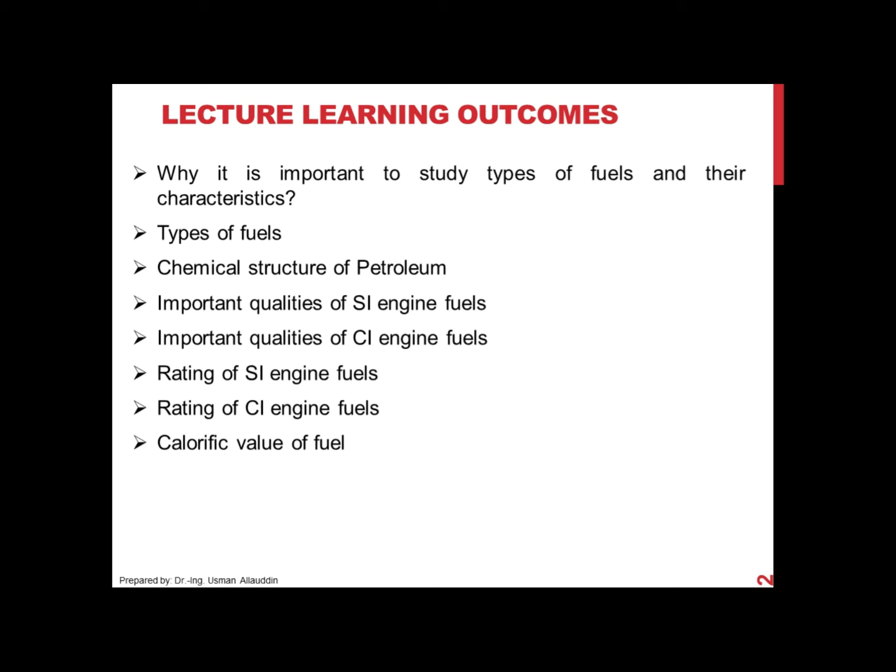These are the learning outcomes of today's lecture. First, we will study why it is important to study different types of fuels and their characteristics. Then we will learn types of fuels, chemical structure of petroleum based fuels, important qualities of SI engine fuels, and important qualities of CI engine fuels. Later, we will study the rating of SI engine fuels and rating of CI engine fuels, and at last we will study the calorific value of fuel, including high calorific value and low calorific value.

Let's discuss why it is important to study different types of fuels. Fuels have been studied since the internal combustion engine came into existence. Internal combustion engines are heat engines, and heat engines convert heat energy into mechanical energy. This heat energy comes from burning fuel.

Fuel has chemical energy. We mix the fuel and burn it in the presence of oxygen, then this chemical energy is converted into heat energy, and then this heat energy is converted into mechanical energy.

Since heat energy is the main input of heat engines, and heat energy is derived from fuel, it is very important to study the fundamental knowledge of different types of fuels and their characteristics in order to understand the combustion phenomena in internal combustion engines.

The characteristics of fuel also decide the design, efficiency, output, reliability, and durability of an engine, because all these parameters depend on the type of fuel used. Gasoline engines are different from diesel engines. Because of the different fuel, we have different design, different output, efficiency, reliability, and durability of an engine.

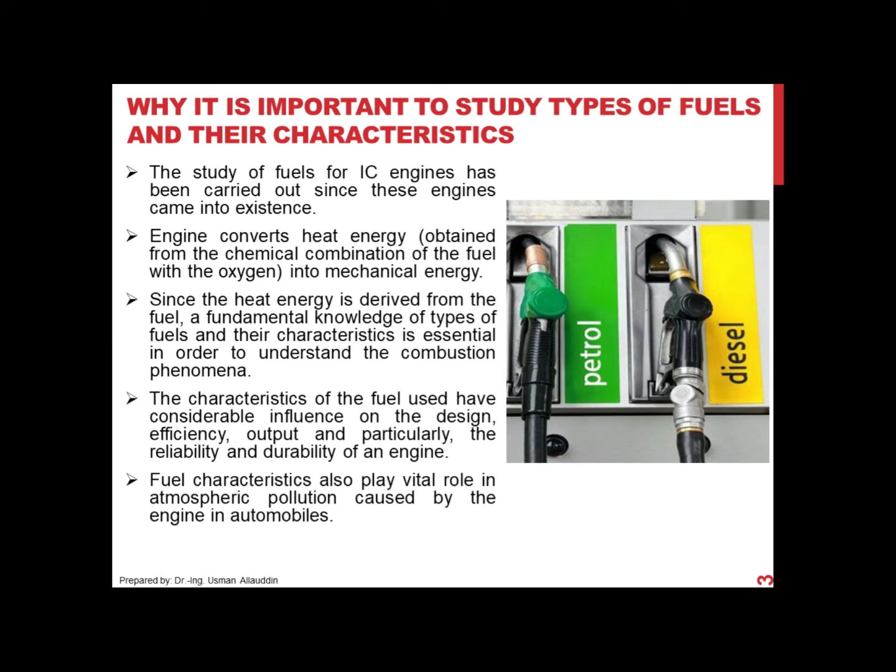These are the main parameters on the basis of which we have to study different types of fuel. Because of this, we have a separate chapter in the book Ganesan on fuels.

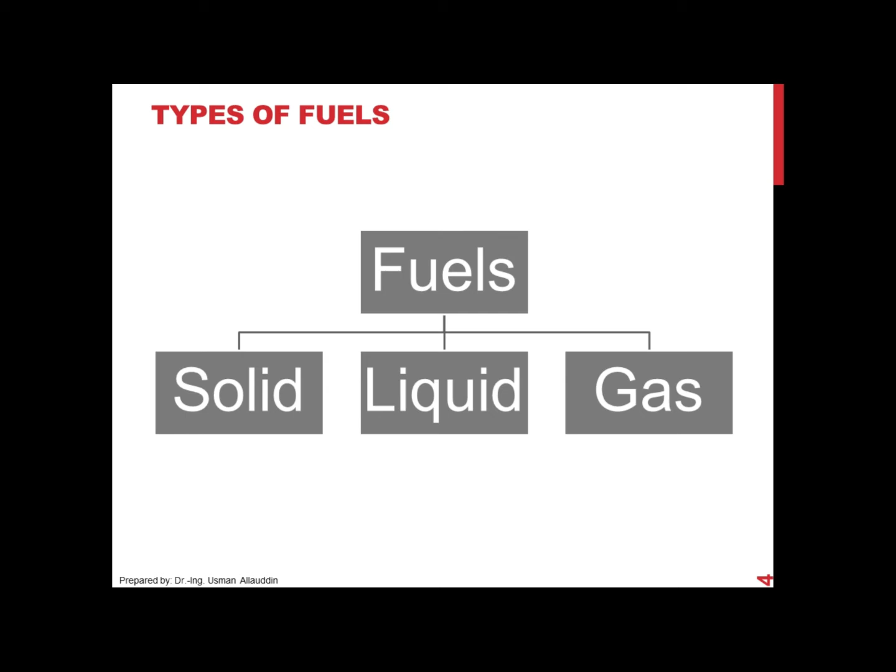Fuels can be broadly classified into three categories: solid fuels, liquid fuels, and gaseous fuels. We will study the advantages and disadvantages of each one by one.

Let's first study solid fuels. In solid fuels we do not have many options. Normally we have coal, and you must have seen in old videos that in the past we had steam engines.

In steam engines we used to use coal or powdered coal. There used to be a furnace on the steam engines, and there was a big pile of coal, with two or three workers who used to throw the coal with shovels into the furnace. In the furnace the coal burns and heat is liberated, and that heat is used to drive the steam engines.

These engines were used in the past, in the initial stages. Now these engines have become obsolete because of their handling problem.

If we have solid fuel, the fuel will have a larger volume, occupying a larger space in the vehicle, and we have to dedicate a big portion of the vehicle to store it. So we have the handling problem, and then solid residuals and ash formation. Like when we burn coal, we have ash and solid residual formation, and these greatly affect the environment by polluting the atmosphere.

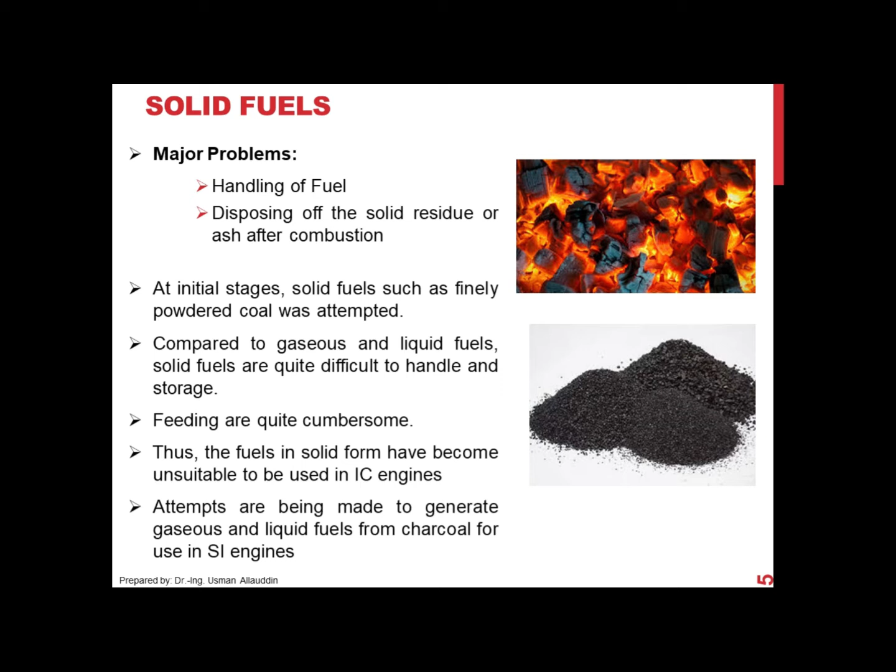If I tell you that you have to use coal in your bike, then you must have a big bag of coal, and there must be a separate person sitting at your back, who with the help of a small shovel must be throwing that coal into the furnace in the bike. The coal will burn, heat will be liberated, and the bike will move. So you can think about how complicated the bike will become. You have to carry additional weight, additional person, additional equipment, and the size and design of the engine will become very complicated. So solid fuels are not being used in internal combustion engines.

In most modern internal combustion engines, liquid fuels, mostly derivatives of petroleum-based fuels, are being used - for example, benzyl, alcohol, gasoline, and other petroleum-based products. Petroleum products form the main fuels for IC engines as of today. Currently, mostly petroleum-based liquid fuels are being used, like petrol or diesel in internal combustion engines, and kerosene in aircrafts. Then we have the gaseous fuels.

Gaseous fuels are ideal because they are in the gaseous form, and you know that to burn fuel, we need oxygen, which is also in gaseous form. So gaseous fuel and oxygen will mix very easily, making a homogeneous air-fuel mixture that can be burned very easily.

The problem with liquid fuel is that we can only use liquid fuels which are volatile, meaning the fuel should be evaporated, converted into vapor form, so that the vapor molecules of the fuel mix with air and form a proper homogeneous air-fuel mixture. So the problem with liquid fuel is that it should be volatile.

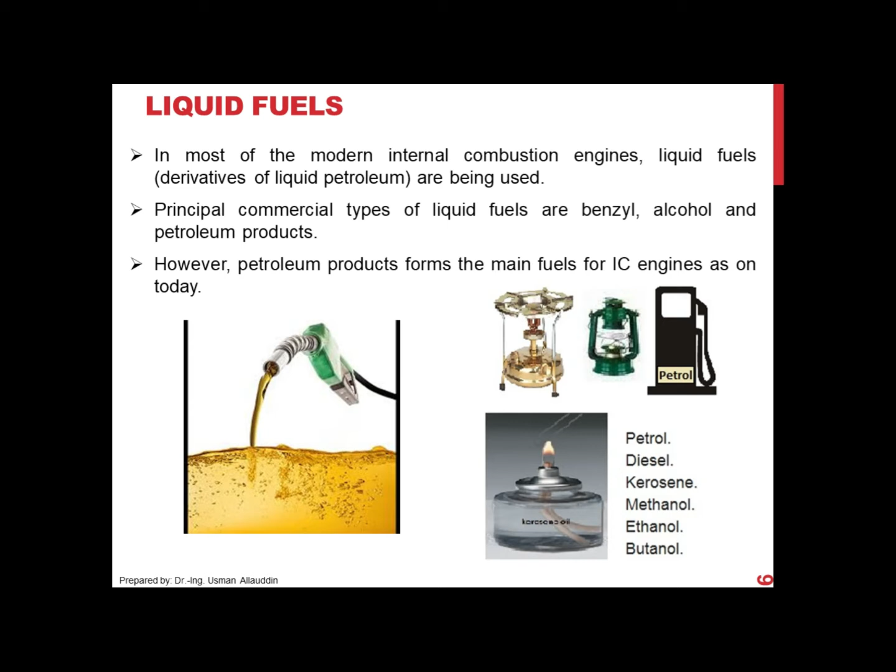But gaseous fuels are ideal in the sense that they are already in the gaseous form, and oxygen is also in the gaseous form. So gaseous fuel and oxygen can mix together and form a homogeneous mixture very easily, and that fuel can be provided to the engine through the distribution system, and the starting problems of the engine can be eliminated.

However, you know that the gas occupies a larger volume. So again, we will be facing the storage and handling problems.

Like those who are using CNG based cars, they must be experiencing these problems. If you want to run your car on natural gas, we will be using a very large cylinder at the back of the car, and that cylinder has weight, very high weight. So the performance of the engine is affected by the presence of this CNG cylinder. You cannot put luggage at the back of the car, the dicky will be occupied.

Secondly, the car is not actually empty, because the CNG cylinder is there, its weight is there. So, for example, you're always carrying one person's worth of weight in the form of the CNG cylinder. So we face these storage and handling problems.

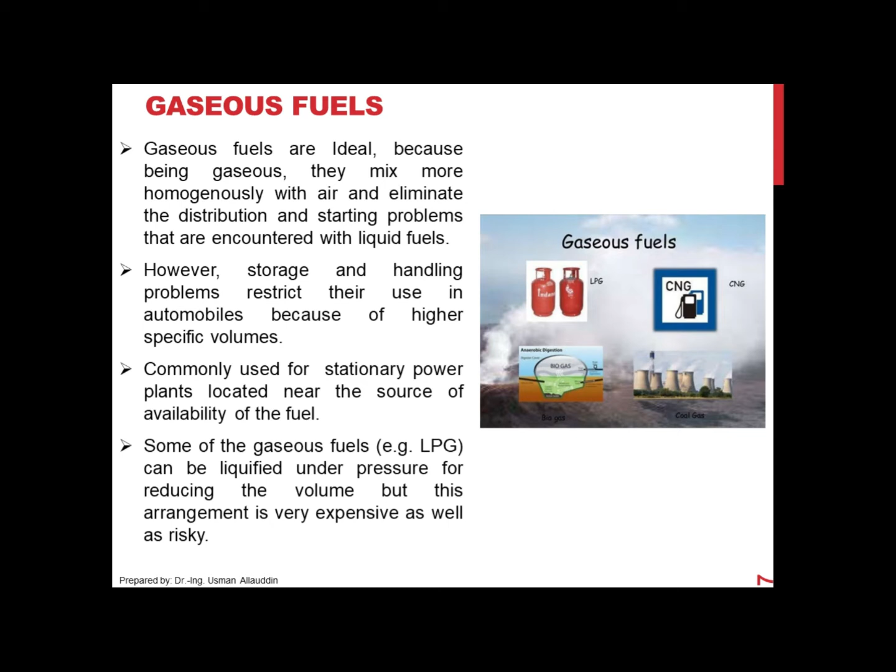Okay, so now that was a quick comparison of solid, liquid, and gaseous fuels. Now we will broadly discuss the chemical structure of petroleum-based fuels. Normally, in petroleum-based fuels, we have paraffins, olefins, naphthenes, and aromatics.

What are paraffins? You have studied this in second year chemistry, in organic chemistry. Paraffins are like alkanes, with general formula CnH2n+2. For example, if n is 2, C2H6, it will be ethane. These alkanes are chain type compounds, and they are saturated because they have single bonds, and the single bond is relatively stronger than the unsaturated bond, that is the double bond or pi bond. That is why they are called saturated, and because of the single bond they are stable.

Olefins are also called alkenes. Alkenes have at least one double bond in their structural formula, and their general formula is CnH2n. They are also chain type compounds, and because of the presence of the double bond, these compounds are unsaturated and unstable. You must remember that these compounds are highly involved in different types of reactions, because they are unstable and react with other elements.

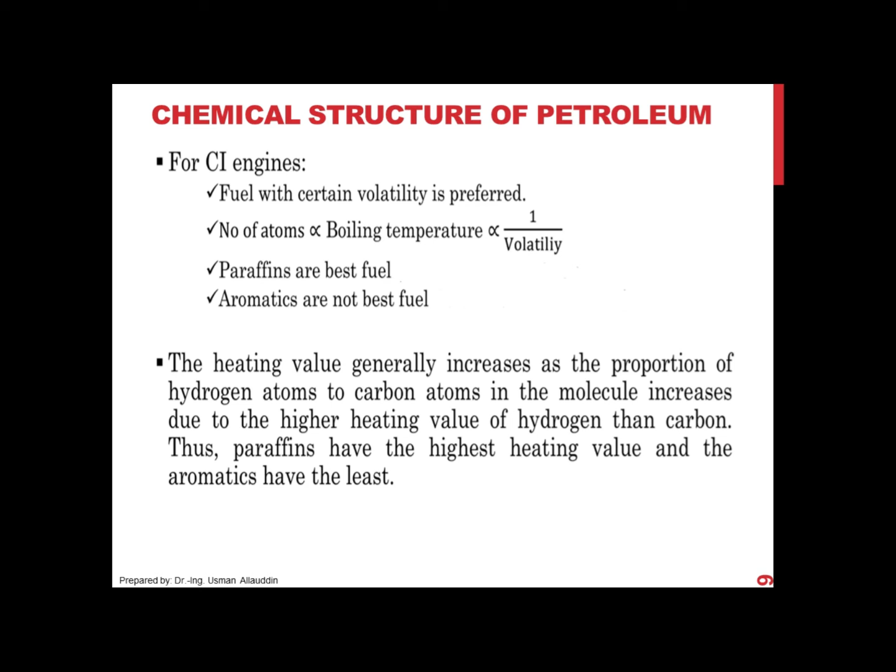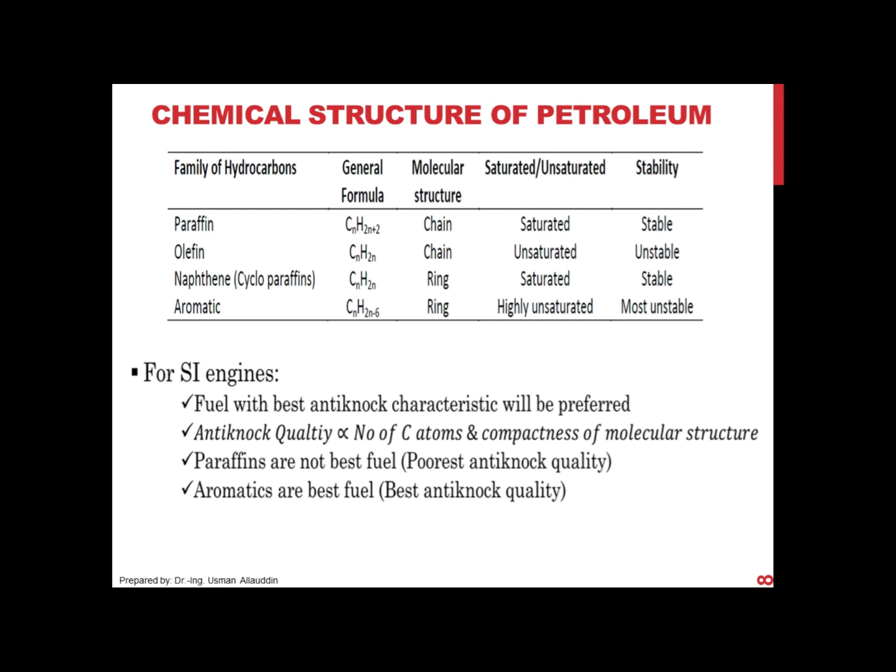Paraffins have the highest heating value, and aromatics have the least, because in paraffins we have the formula CnH2n+2, while in aromatics we have CnH2n-6. If N is 6, then 2 times 6 is 12, plus 2 is 14 hydrogen atoms, giving C6H14. Whereas for aromatics, C6, 2 times 6 is 12, minus 6 is 6, so there are only 6 hydrogen atoms. Since aromatics have fewer hydrogen atoms than paraffins, paraffins' heating value should be higher because of the higher number of hydrogen atoms.

Now we will study some important qualities of SI engine fuels. First of all, the very important property of SI engine fuel, as I already explained, is volatility. SI engine fuel should be highly volatile, because we need fuel which is very quickly converted into gaseous form, then mixed with air to form a homogeneous air fuel mixture, which is supplied to the combustion chamber through the intake manifold. So volatility should be high.

So what is volatility? Volatility is the evaporation of liquid at a certain temperature. If fuel is not converting into gaseous form, it means its volatility is very low. And if the fuel is very quickly converting into gaseous form, it means its volatility is very high.

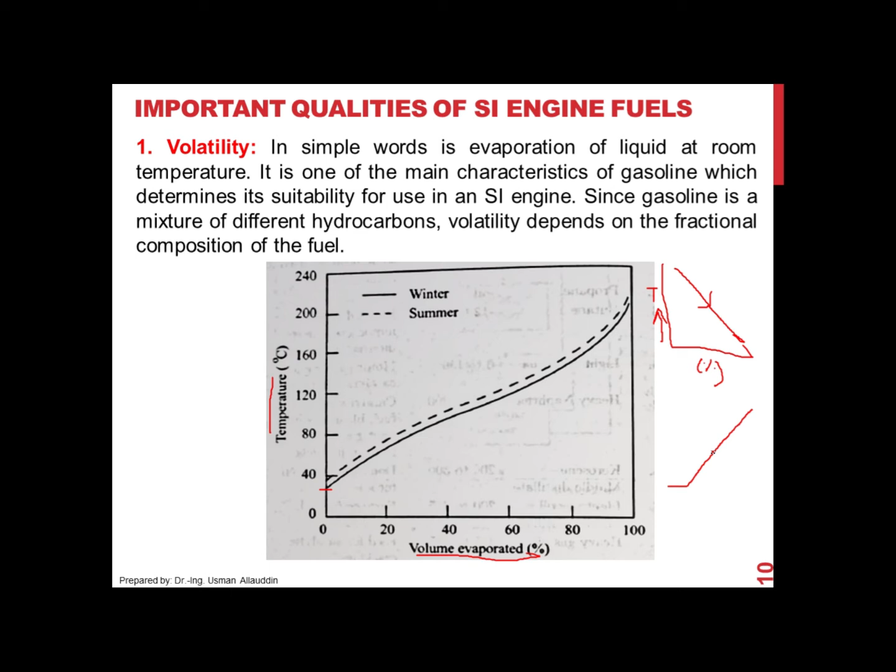It is because of the fact that due to low temperatures in winter, the fuel volatility is decreased, and the air fuel mixture is not formed, so the engine does not start. So you face these problems. In order to overcome these problems, we use the glow plug, which heats the fuel and avoids the starting problems in internal combustion engines.

The second characteristic required in the SI engine fuel is that it should support starting and warm up. At room temperature, at least 5 to 10% of the fuel should be evaporated. If we have this characteristic, then it is good. So we need this characteristic in the SI engine fuel.

If we have this characteristic, then we will not face startup and warm up problems. For this we need low distillation temperatures throughout the range of the distillation curve for best warm up. In the distillation curve, low distillation temperatures are required. So if, for example, 5% or 10% of the fuel is evaporating at 100 degrees Celsius, then this is not a good fuel.

The temperatures at which about 5 to 10% of the fuel is evaporated should be low, close to room temperature. So the fuel characteristic should be such that it avoids the problem of starting and warm up, but it should also support the whole operating range of the engine.

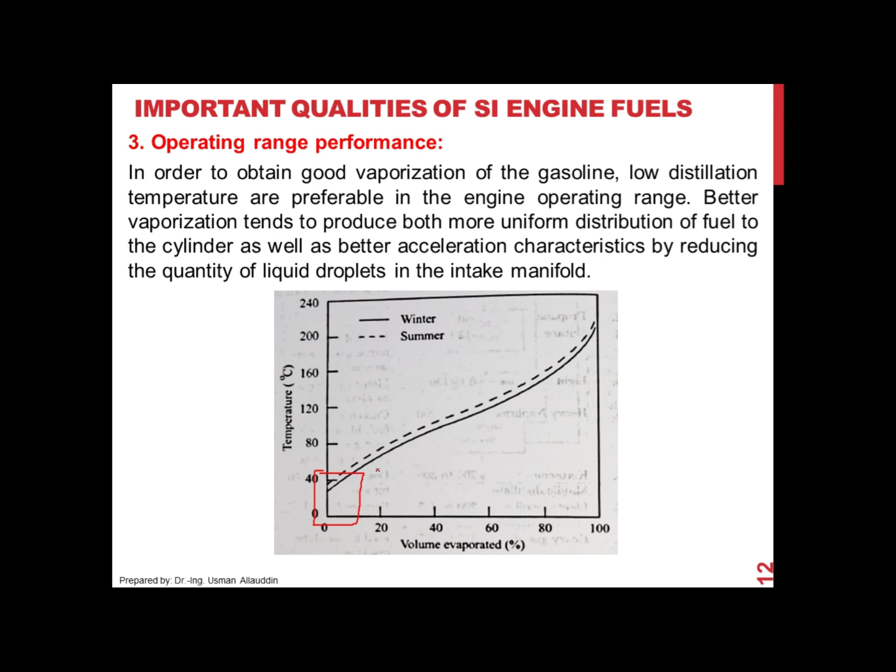This is required for better acceleration characteristics of the engine. If we have such characteristic that fuel volatility increases with temperature, then liquid droplets are not formed in the intake manifold, because if the fuel is not evaporating, liquid droplets are formed. But if the fuel volatility is high and supports the whole operating temperature range, then the fuel will readily evaporate, and liquid droplets will not be formed.

Now, crankcase dilution. Suppose the fuel is not evaporating, is not volatile - what will happen? Fuel in liquid form will go into the engine, and we have a layer of lubricating oil on the moving parts, like in the crankcase. When the fuel in liquid form enters the engine, these liquid droplets will mix with the lubricating oil and remove the layer of lubricating oil from the crankcase, and the crankcase will become diluted.

The lubricating oil will be removed from the crankcase, and then that part of the crankcase will be moving without lubricating oil, so it will affect its life, it will deteriorate the shape of the crankcase.

When the liquid fuel goes into the engine, it will mix with the lubricating oil, and the lubricating oil performance will be affected. The oil has a sticky touch, a sticking property, different from the liquid fuel. So when the fuel keeps mixing with the lubricating oil, its oiliness will be lost.

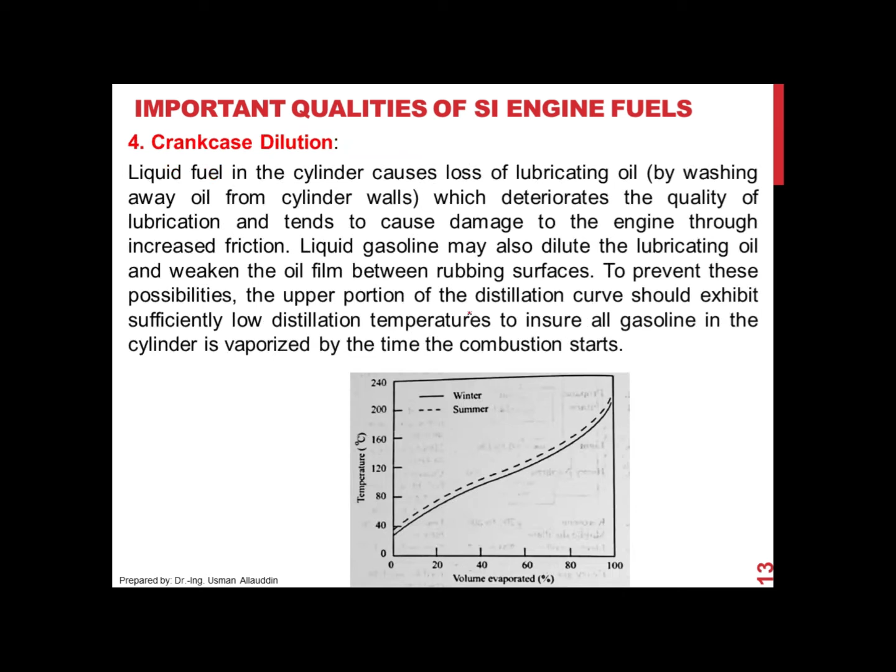So we have to make a compromise, that fuel volatility should be moderate - not very high, not very low. Because if the fuel volatility is low, we will face crankcase dilution, operating range performance issues, and starting and warm-up problems. And if the fuel volatility is very high, we will face the problem of vapor lock. So to avoid all these problems, we use a fuel with a certain suitable value of volatility.

Number six, the anti-knock quality - this is the obvious requirement that we need such SI engine fuel which should have a good anti-knock quality, that is, the fuel should have good resistance to knocking.

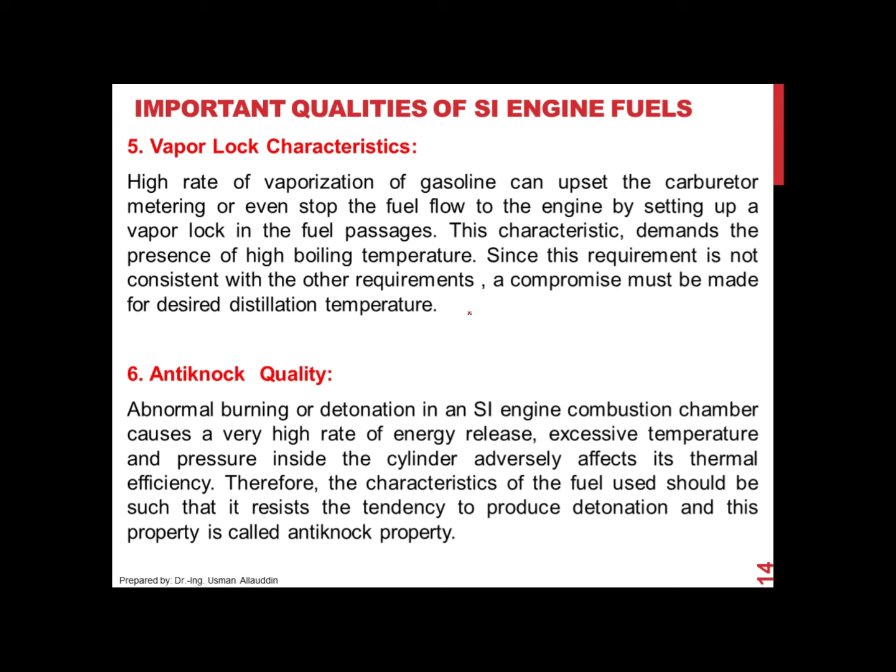Another desired characteristic of SI engine fuel is that it should not form gum deposits. Gasoline and petrol are petroleum-based fuels, and they are hydrocarbons. The problem with hydrocarbons is that when you store them in a tank and they react with oxygen, liquid gummy compounds are formed, and solid gummy substances form at the layer exposed to the atmosphere.

If you do not use your vehicle and the fuel stays in the fuel tank for 2, 3, or 6 months, these gums form as solid deposits. When these solid gummy substances go into the engine, they will damage the internal combustion engine. So the desired quality of SI engine fuel is that it should not form gum deposits.

The amount of gum increases with increased concentration of oxygen, with rise in temperature, with exposure to sunlight, and also on contact with metal. If the fuel is exposed to sunlight, these gummy substances are formed. And if we increase the concentration of oxygen, the concentration of gummy substances will also increase.

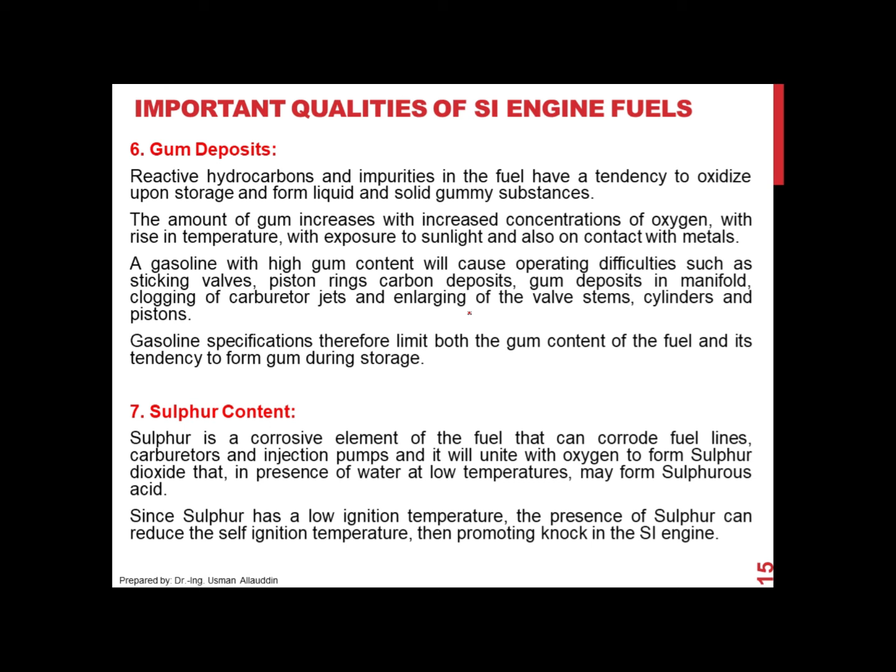The seventh characteristic of SI engine fuel is that it should have a very low content of sulfur, because sulfur is a corrosive element and can corrode the fuel lines, carburetors, and injection pumps. It will also unite with oxygen to form sulfur dioxide, which is a highly toxic gas, and in the presence of water at low temperature they form sulfurous acid, which is a very dangerous acid. So we need fuel for SI engines that has low sulfur content. These were some important characteristics of SI engine fuels.

Now we will study the important qualities of CI engine fuels. The first quality is knock characteristics.

Now you must be wondering that we studied knocking only occurs in SI engines, but knocking also occurs in compression ignition engines. The reason for knocking in CI engines is very different. Knocking occurs in both types of engines, spark ignition and compression ignition, but the reason is totally different in each.

So what is the reason of knocking in CI engines? Let me explain. As I've told you many times, in compression ignition engines we only compress air, and then we spray the fuel into the compressed air. So now what happens, let's suppose...

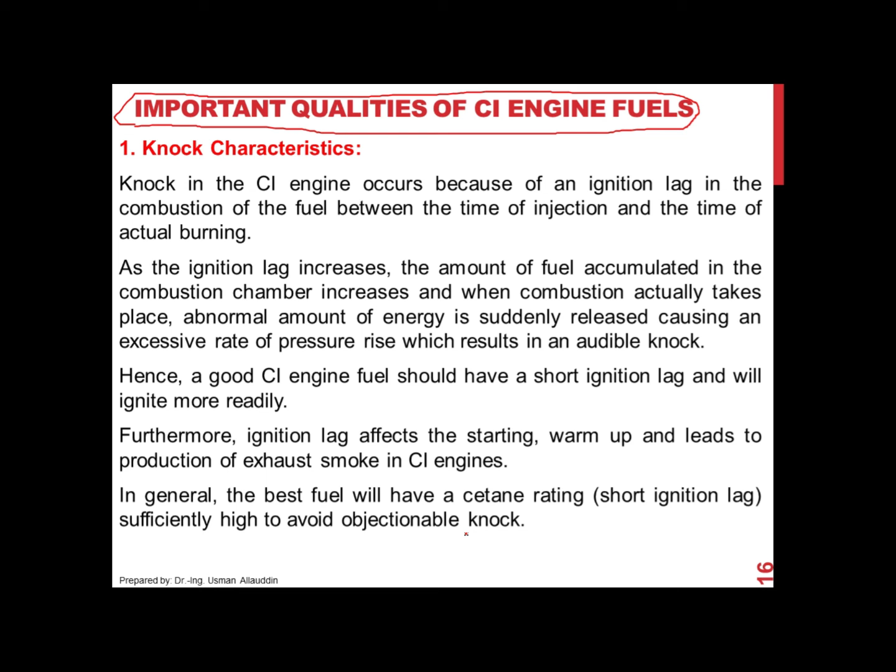The second property required for CI engine fuel is volatility, but it should be moderately volatile, not highly volatile.

We need such a fuel in CI engines that provides very good starting characteristics of the engine. This requirement demands that the fuel be volatile enough to form a combustible mixture readily, and have a high cetane rating so that the self-ignition temperature is low.

The fuel should be volatile enough that a proper combustible air-fuel mixture is formed and combusted, because if the fuel is not evaporating, its effective self-ignition temperature becomes high and combustion will not take place.

But if the fuel is volatile enough, a good homogeneous air-fuel mixture is formed when you spray it into the hot air. It absorbs heat from the compressed air and starts evaporating, forming gaseous fuel, which mixes with hot air to form a homogeneous air-fuel mixture that is then combusted. So if the homogeneous mixture is formed, its self-ignition temperature will be low and it will be very easily combusted.

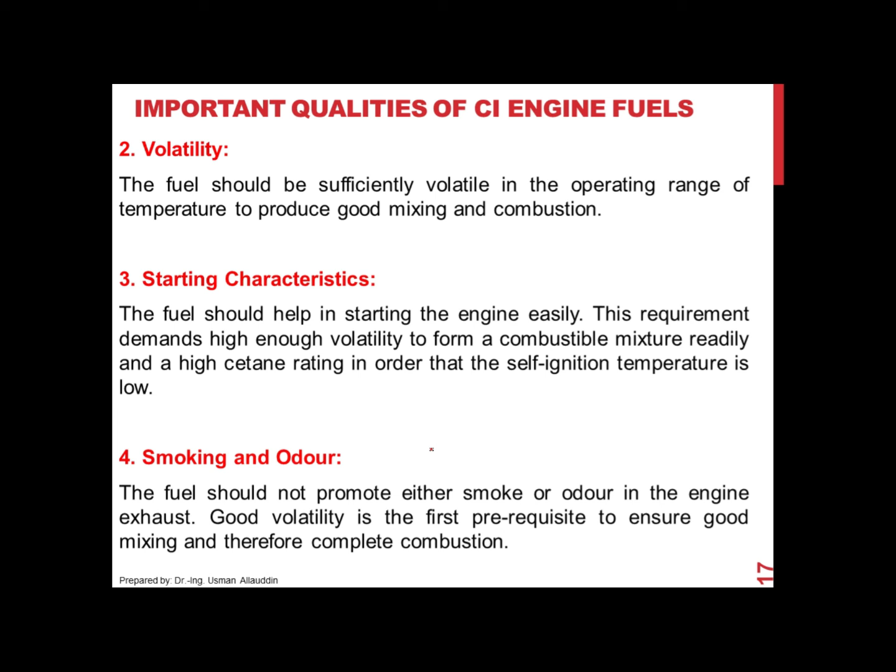The fourth desired property of CI engine fuel is that it should not form smoke and odor when burned in the engine.

Normally we use cheaper fuels in CI engines, and these cheaper fuels have higher values of viscosity, but they should not have too much viscosity that the fuel is unable to flow into the fuel lines or other passages. So we need a fuel with such viscosity that it can easily flow through the different passages of the engine.

The fuel should not corrode or wear the different parts of the engine. This is the sixth requirement of CI engine fuels.

It should be easily handled. Its properties should be such that it can be easily handled, easily stored, and easily supplied to the different parts of the engine. So it should have such characteristics.

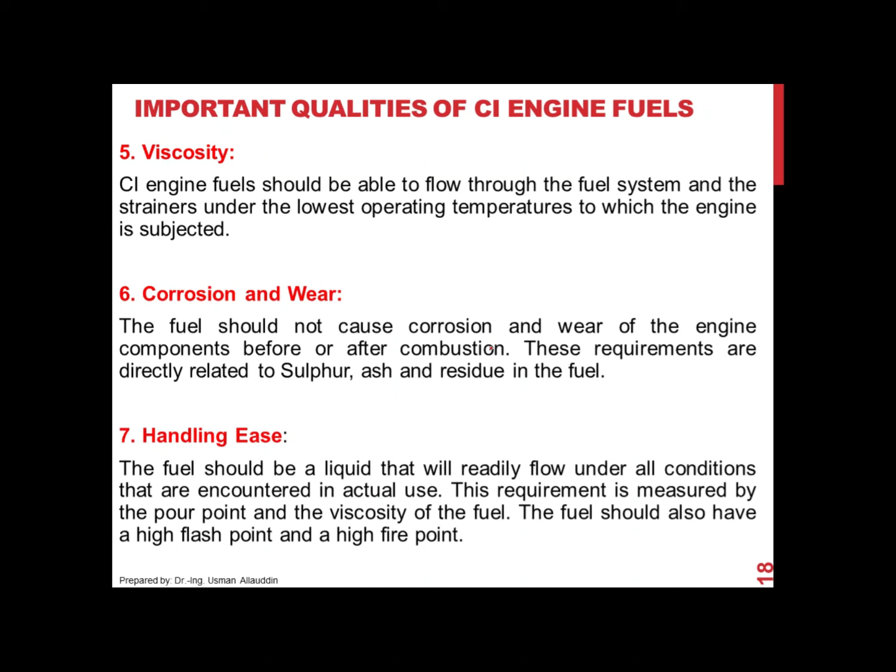Okay, now we have studied different important qualities of SI and CI engine fuels. Now we will start a new topic: rating of SI engine fuel. Actually, rating of SI engine fuel is the...

Resistance to knocking. So if we have two fuels, fuel A and fuel B, and I say that fuel A has high fuel rating and fuel B has low fuel rating, it means fuel A has high resistance to knocking and fuel B has low resistance to knocking. So rating is like a number from 0 to 100 which describes the resistance to knocking.

We want to develop a method according to which we can rate different SI engine fuels. If we have a fuel with 100 number, we can say that its rating is maximum, and its resistance to knocking is maximum, and that fuel can be used at high values of compression ratio, and high compression ratio means higher efficiency. And if we have 0 or 1 rating, it means it has a very poor rating, it's a very poor fuel, and its resistance to knocking is very poor. This number is actually the octane number.

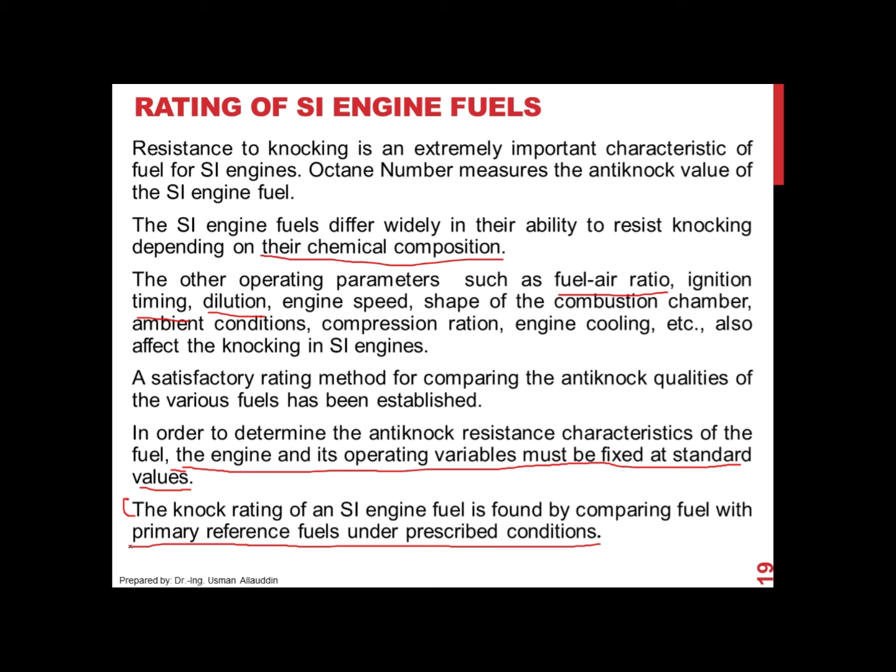If you remember in chemistry, when you want to determine the molecular weight of an element, you develop some standard, and that standard is the carbon atom. So if you want to find the molecular weight, you always compare it with the molecular weight of the carbon atom, because the weight of the carbon atom is standard. We will do the same thing: we will first select the reference fuels, the standard fuels, and these reference fuels are...

Isooctane and normal heptane. Isooctane has very good anti-knock characteristics, it has the highest resistance to knocking. When used in different engines, it is observed that isooctane has the highest resistance to knocking. So we have arbitrarily assigned a rating of 100 octane number to isooctane.

Then we have the other standard, normal heptane, and we have observed that normal heptane has very poor anti-knock quality. That is, if we use normal heptane, at very low values of compression ratio we start observing knocking, which means normal heptane has very poor resistance to knocking. When we use isooctane in an engine, we can run it at very high values of compression ratio and not observe knocking, showing it has very high resistance to knocking. So we arbitrarily assign 100 octane number to isooctane, and 0 octane number to normal heptane.

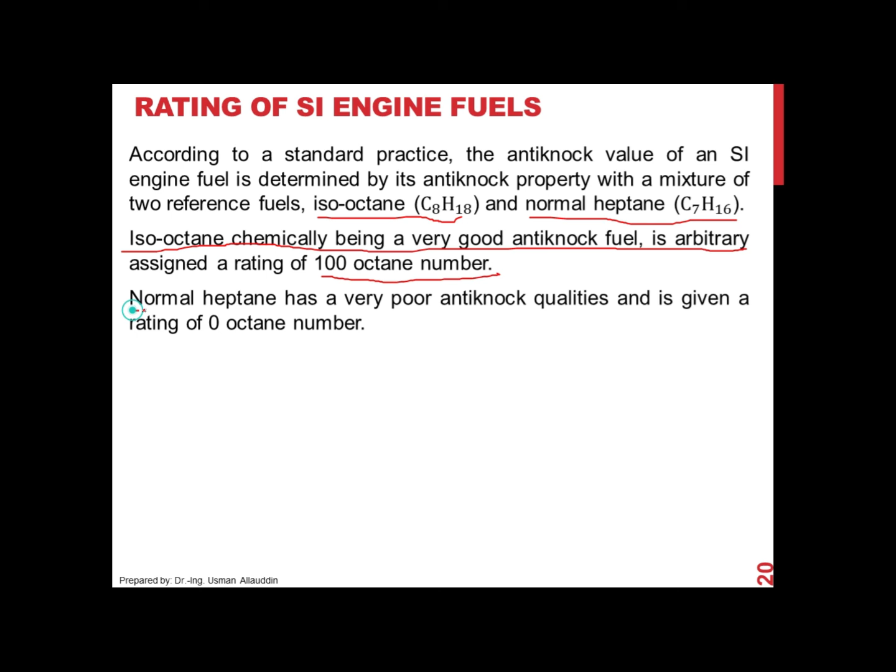So now we have two standards: isooctane has 100 number, and normal heptane has 0 number.

Let's suppose we want to determine the octane number of fuel A. So we will take fuel A, put it into an engine, and at some standard operating conditions, we will use this fuel at different values of compression ratio—compression ratio 1, 2, 3, 4—

Until we start observing the knocking. What we are doing is using fuel A in the engine and increasing the compression ratio, and we stop increasing it until we observe the knocking.

When we observe the knocking, we will note this value. Now we will remove fuel A from the engine, and we will try to prepare a mixture from isooctane and normal heptane, taking different proportions, like 10% isooctane 90% normal heptane, 20% isooctane 80% normal heptane. We use different percentages of isooctane and normal heptane, and we try to get the knocking at the same value of compression ratio at which we observed the knocking for fuel A.

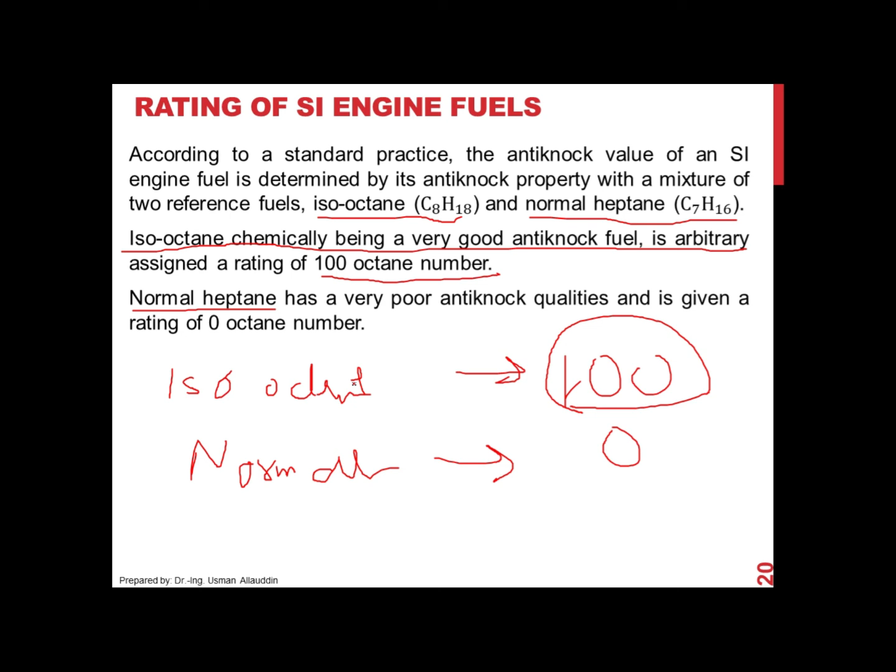So now the question is, can we have octane number greater than 100? The answer is yes, we can have octane number greater than 100. How can we achieve that? By adding different additives, like compounds such as tetraethyl lead. If we add tetraethyl lead to the fuel, then the fuel's octane number will actually become greater than 100.

But the problem is that tetraethyl lead is not good, because when you use tetraethyl lead in the fuel, lead particulates will be formed in the exhaust gases, and these lead particulates will cause cancer problems in living things.

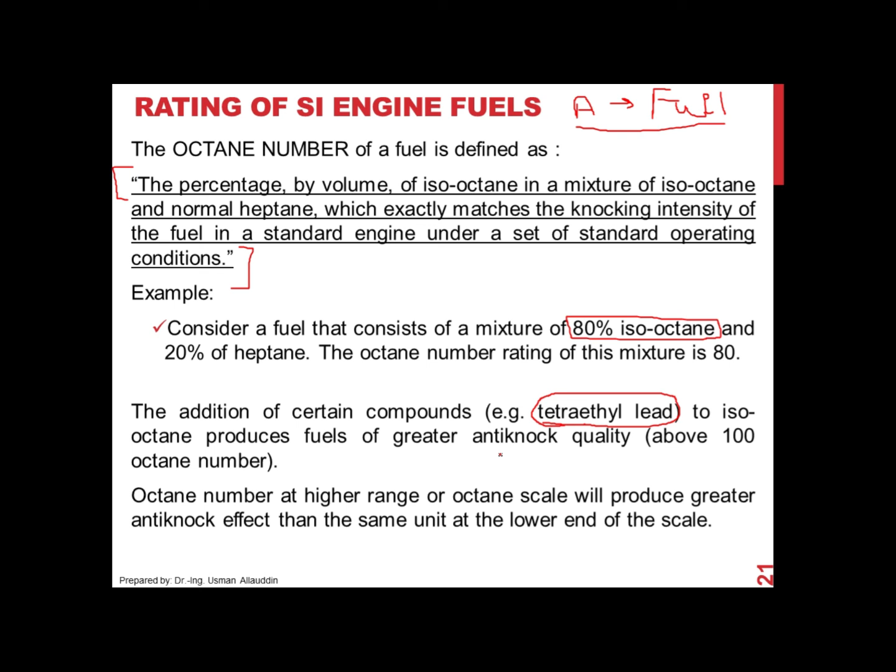So there are some other additives also available which can be added into the fuel to achieve an octane number higher than 100. In the book, if you go to chapter 6 of Ganesan's book, there is a formula given which relates the octane number to the percentage of tetraethyl lead. You can determine the octane number, like 102, 103, or 104, depending on the percentage of tetraethyl lead added into the base fuel.

A high octane number shows high resistance, and a low octane number shows low resistance. So if you go to the market and find two fuels, one with a high octane number and one with a low octane number, you should go for the high octane number fuel, because it will have greater performance.

Because if you buy a high octane number fuel, then that engine can be run at higher values of compression ratio, and a higher compression ratio means higher efficiency and higher performance.

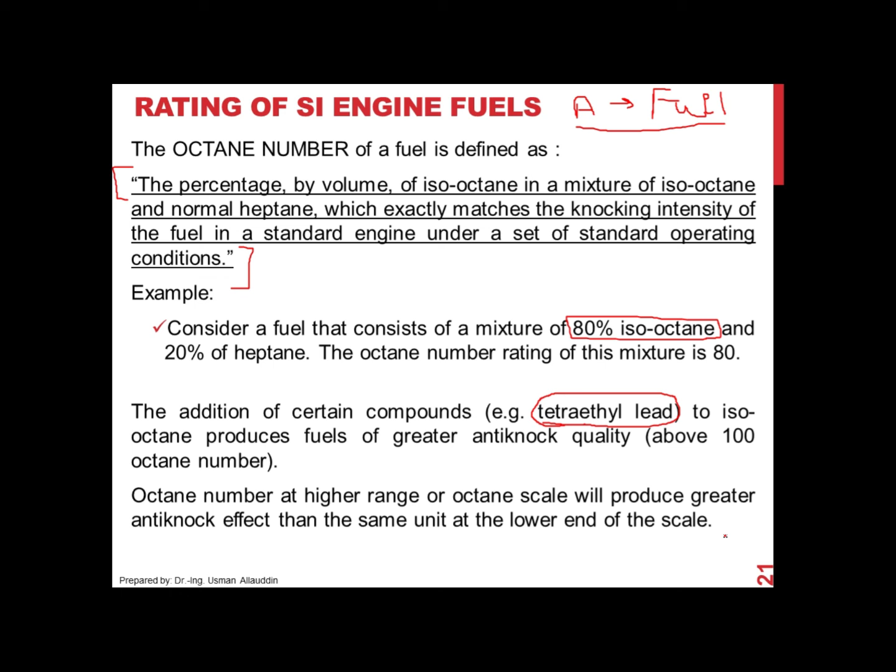Similarly, the rating of CI engine fuels is determined in the same way using two standards, but the standards are different for CI engines. One is normal cetane, arbitrarily assigned a cetane number of 100, and alpha methyl naphthalene, C11H10, arbitrarily assigned a cetane number of 0.

So the rating of CI engine fuel is determined with the help of cetane number. Like we studied, the octane number defines the rating of SI engine fuel, so the cetane number defines the rating of CI engine fuel. If we have a high cetane number, it means the fuel has very low self ignition temperature and very low ignition lag, so when sprayed into the cylinder it will be immediately burned.

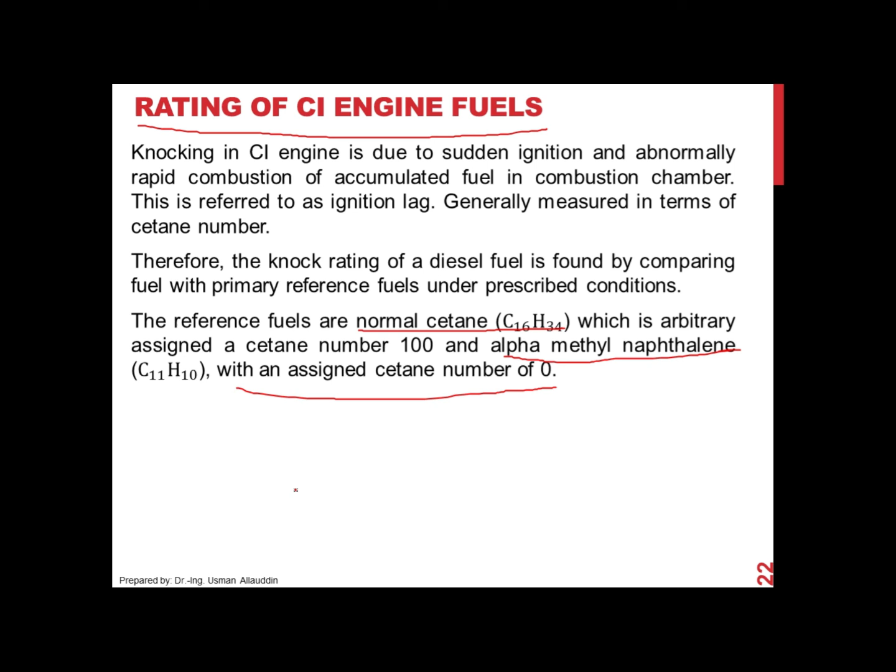Similarly if the cetane number is high, we take a fuel A and run the engine with it, observing at what compression ratio knocking is observed. Then we remove fuel A and make a mixture of normal cetane and alpha methyl naphthalene, trying to match the same intensity of knocking. When this is achieved, we note the percentage of normal cetane present in that mixture, and that will be the cetane number of the fuel.

So you can read this definition to understand it better. The cetane number can be easily improved by adding additives such as amyl nitrate, ethyl nitrate, or ether. If you add these compounds to CI engine fuels, the cetane number will be improved, and improved cetane number means the performance of the engine will be improved.

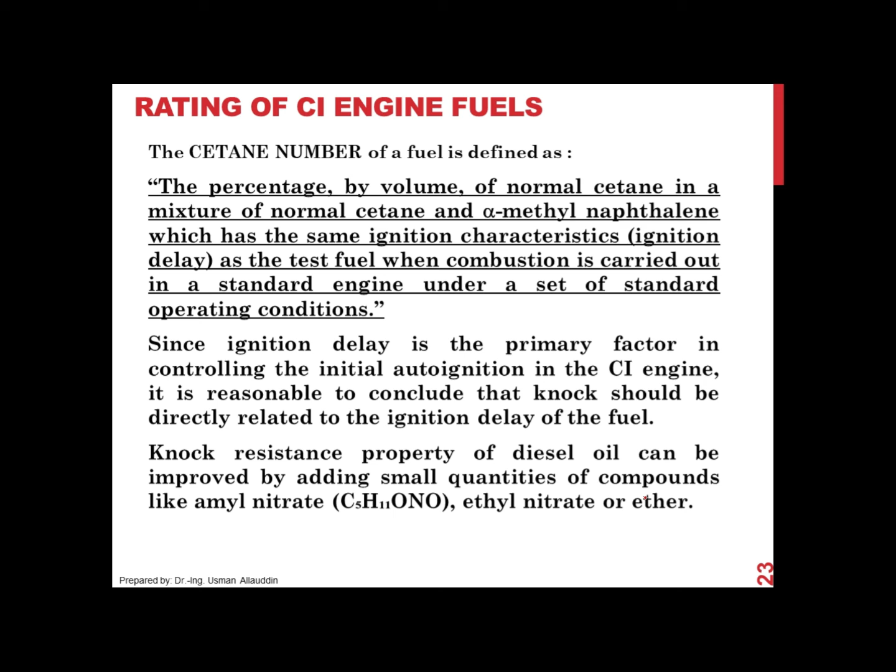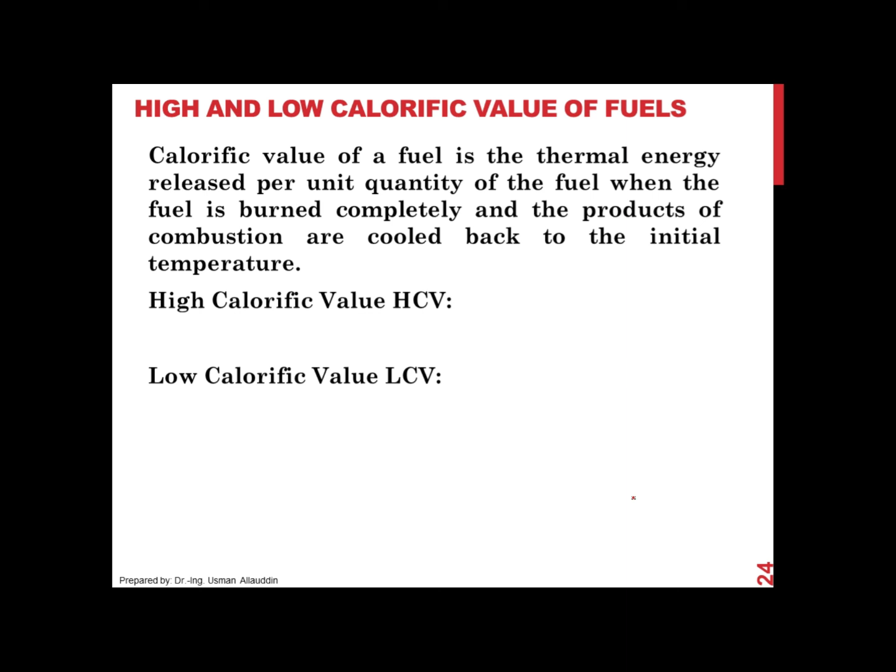Now let's come to the last topic of today's lecture, the calorific value. What is calorific value? It is the thermal energy released per unit quantity of fuel. Let's suppose 320 kilojoule per kilogram is the calorific value of a fuel. It means that if you burn 1 kilogram of fuel, 320 kilojoule of energy will be released. So this is the meaning of calorific value.

There are two types of calorific value: high calorific value and low calorific value. High calorific value is when the fuel is burned completely and the products of combustion are cooled back to the initial temperature.

What is the logic? The products of combustion are CO2 and H2O, and combustion is a highly exothermic process, so a high amount of heat is released. This heat is absorbed by H2O, converting it to gaseous form. When the combustion products are cooled back to the initial temperature, the gaseous H2O is condensed back to liquid phase, and the heat absorbed is released and can be used additionally. So the calorific value becomes high, as a high amount of heat is released.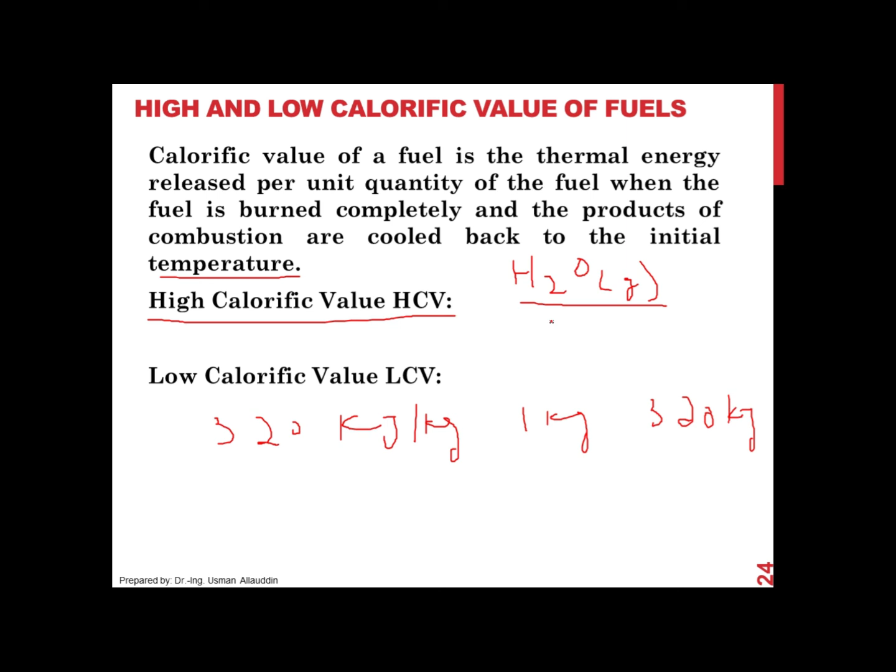When the fuel is burned completely and the products of combustion are not cooled back, but thrown into the atmosphere, then that value will be low calorific value. The logic is that since the products are not cooled to the initial room temperature, the heat absorbed by H2O cannot be recovered, and the H2O in gaseous form is dumped into the atmosphere.

I repeat again, there are two values of calorific value: high and low. High calorific value is when the fuel is burned completely and the products of combustion are cooled back to the initial temperature. The logic is that when you burn fuel, H2O is formed and converted from liquid to gaseous form by absorbing heat released from burning. When the products are cooled back, this gaseous H2O is condensed and heat is released, which can be used to run the engine, so a high amount of heat is released, giving high calorific value.

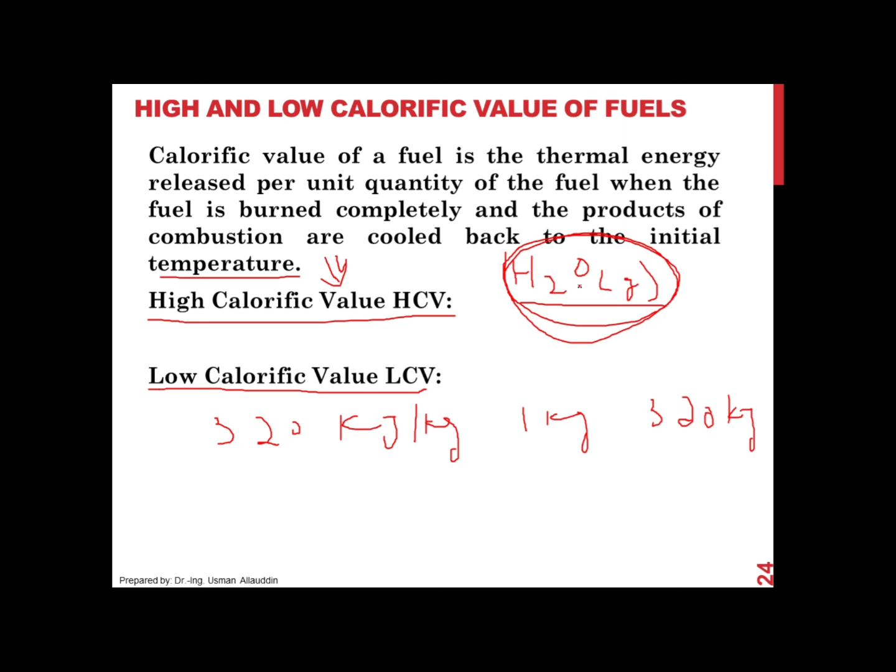When the fuel is burned completely and the products of combustion are thrown back to the atmosphere without cooling them to the initial temperature, that value will be low calorific value. When the products of combustion are thrown to the atmosphere, the heat absorbed by H2O cannot be recovered, so the value will be low calorific value.

Okay, so now these are some tasks which you should do at home as homework. You should search for examples of solid, liquid, and gaseous fuels.

For liquid fuels, you can name petrol, diesel, kerosene. These are the examples of liquid fuels. Then for solid fuel and gaseous fuel, you should Google different types of solid, liquid, and gaseous fuels.

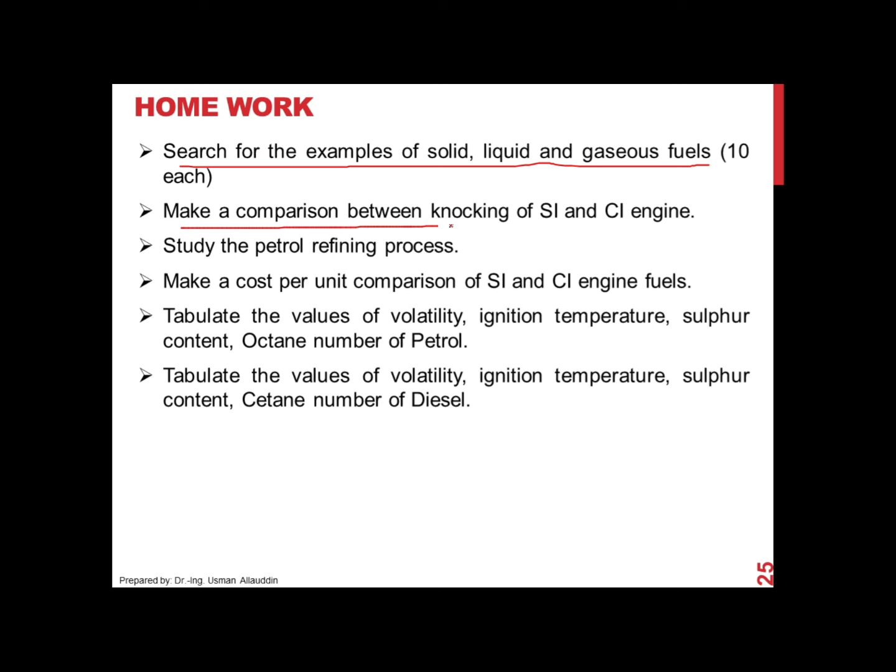At least 10 each. Make a comparison between knocking of SI and CI engine. I have explained in the lecture that the reason of knocking in SI and CI engines is completely different. So you should make a comparison between the knocking of SI and CI engine.

Study the petrol refining process. This is present in the book Ganesan, and this thing you have also done in the matric or intermediate courses. That is why we have skipped this topic. Actually the basic idea behind petroleum refining is that we take the crude oil and heat it to a very high temperature, and then we start cooling it.

When we start cooling it, crude oil is a mixture of different fuels, and different fuels have different boiling temperatures. So when you start cooling it, the fuel which has a high boiling temperature will start condensing. So the fuel will have different boiling temperatures.

So when you cool it, fuel will be condensed at different temperatures, and then you can remove the condensed fuel at the bottom of the chamber. So the details of the petrol refining process are given in the book. I recommend you go through this topic. This is given on page number 190 of book Ganesan.

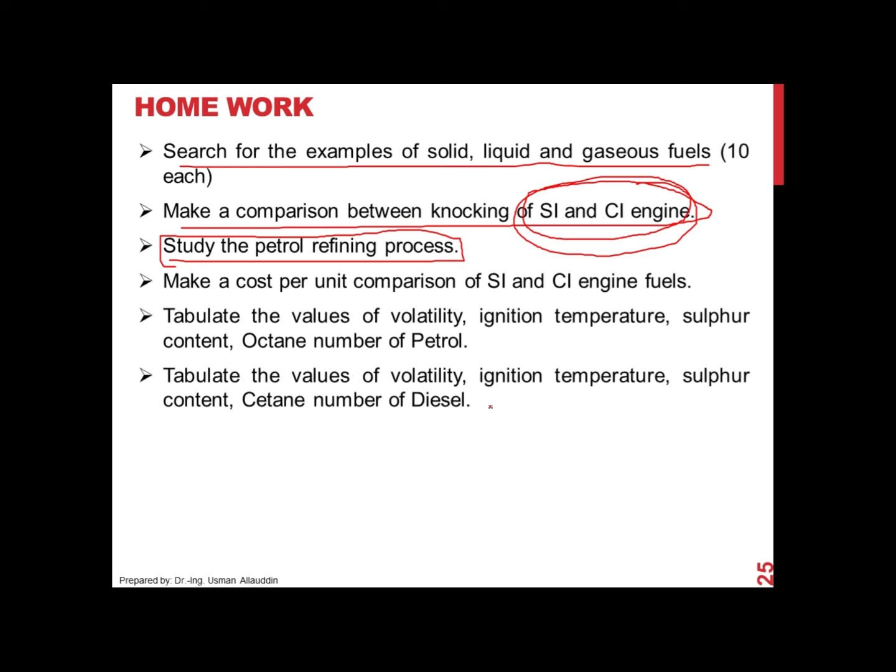So with this, I end today's lecture. I hope you have achieved the learning outcomes of today's lecture. The learning outcomes of today's lecture were that we need to study the important characteristics of SI and CI engine fuels, why it is important to study fuel. We have studied different types of fuels.

We have studied some general qualities of SI and CI engine fuel. Then we studied the octane number and cetane number, which are the rating of SI and CI engine fuels. And then at the end of the lecture we studied the calorific value, high calorific value, and low calorific value.